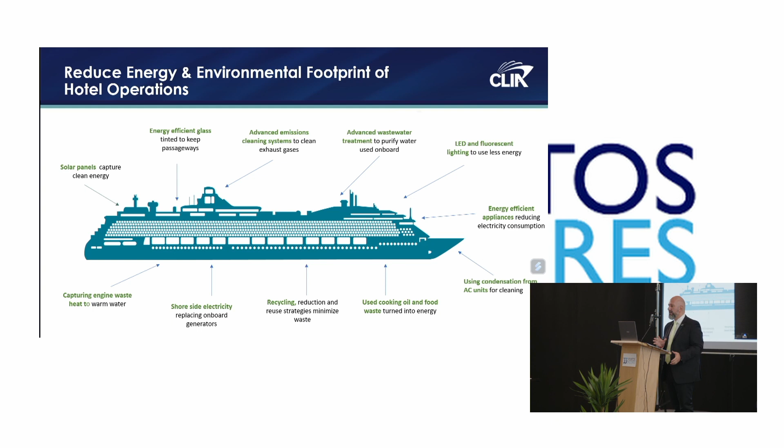So let's have a look at where the ships stand in this whole system. It is small letters, but it just gives you a rough idea about the different technologies that might be applied on a ship. So exhaust gas cleaning systems, systems to purify water on board, and a number of technologies to increase the energy efficiency. So a little bit about those technologies.

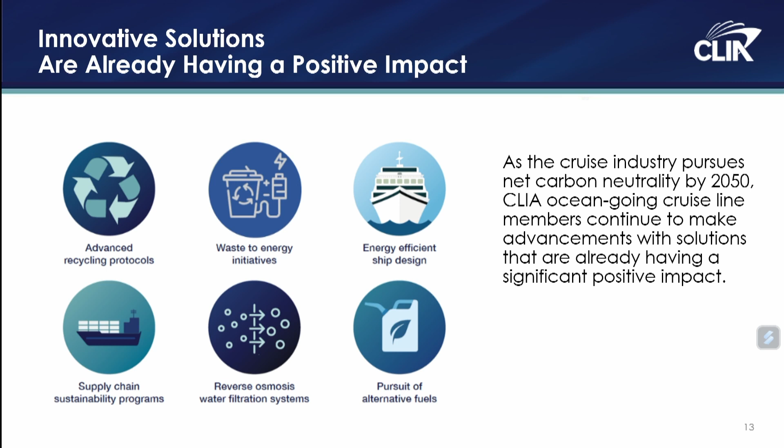CLIA ocean-going cruise line members will continue always to make advancements with solutions that are already having a significant and positive impact, as the cruise sector takes a leading role in driving the development of sustainable marine fuels. Sustainable marine fuels being explored right now include a range of options such as biofuels or other advanced approaches, biosynthetic fuels, methanol, ammonia, hydrogen. We'll see a bit more about that. With every new ship comes more advanced technologies, greater efficiencies.

And just to give you an example, cruise lines are deploying technologically advanced onboard systems to reduce waste and sort materials for recycling, with some cruise operators able to repurpose up to 100% of waste generated on board by removing, reusing, recycling and converting waste to energy.

In addition, there are advanced wastewater treatment systems on board, which treat wastewater to a higher standard than in many coastal cities. And they are consistent with a clear policy that all our member cruise lines need to sign, reaching above and beyond international legal requirements. These systems are in place in 74% of the global cruise capacity and are being built into 100% of all cruise ships on order for delivery between now and 2028.

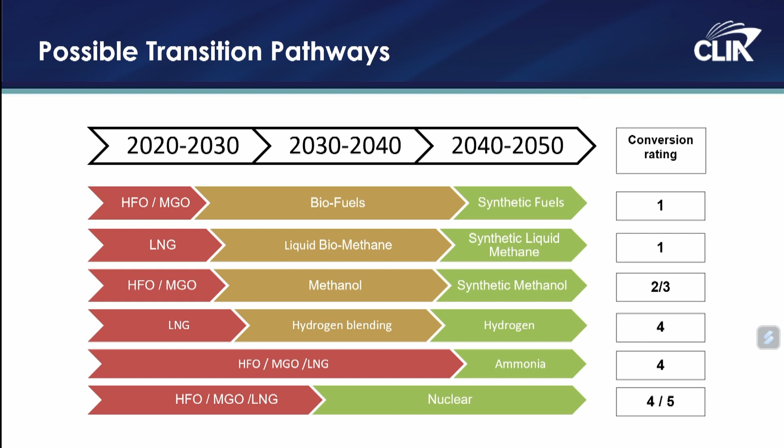In this path to net zero carbon cruising, there are intermediate short-term solutions and obviously long-term solutions some of us have been discussing for years. This schematic will give you a little bit of an understanding of the pathway and what is feasible or not. The complexity within the cruise industry is that vessels currently built and on order shall have a service life beyond 2050. And as the industry transitions between now and 2050, it will not be feasible to switch all vessels to low-carbon fuels before 2050. So a sensible transition shall target vessels that have a maximum return of investment time, balancing conversion costs and penalties against carbon-based fuels.

For a successful transition, a pathway should be adopted, and it is by the Green Deal and the Fit for 55 package adopted by the Commission, and one that is appropriate from a safe, sustainable, and technical point of view. Obviously, as you can see, the timeline on the pathway depends on the availability of fuel as well as technical maturity. So some of those solutions have been categorized as 1, 2, 3, 4, and 5: 1 meaning easy, 2 meaning feasible, 3 meaning neutral, 4 being uncertain, and 5 non-feasible.

So just to give you an idea, the transition from the traditional fuels to ammonia is a very difficult thing, and it might not be achieved in time, but there are solutions like biofuels, LNG, liquid biomethane, that can actually lead to synthetic fuels much quicker than anticipated.

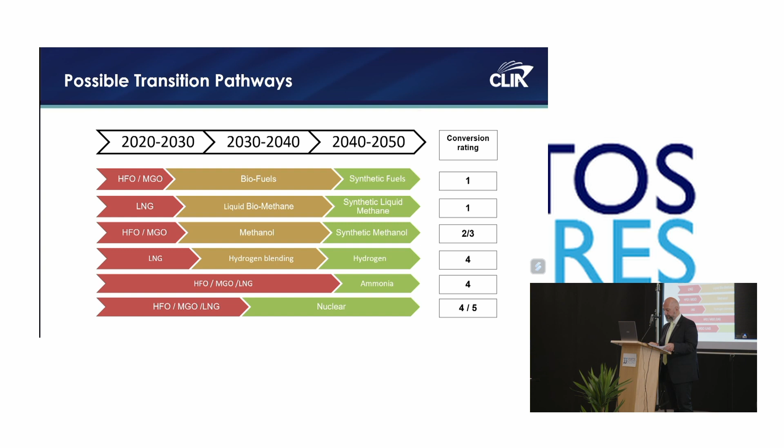So diving a little bit deeper into those, shoreside electricity is one that we've been talking a lot about. We all know the benefits of that by now. The point I would like to focus on is that there are 1,300 ports around the world where cruise ships call, and only 28 of them are actually equipped with shore power. So it is a great effort that needs to happen from world ports.

Whilst currently 40% of the CLIA capacity is equipped with shore power connections, and it will go up to 75% by 2028. So schematically, the ships are ready, the ports are lagging behind, and this is what we need to accelerate, but not everywhere. Not every solution makes sense in every port.

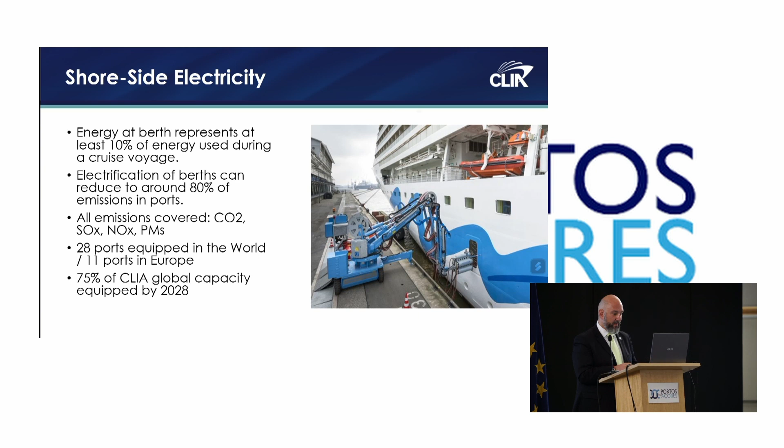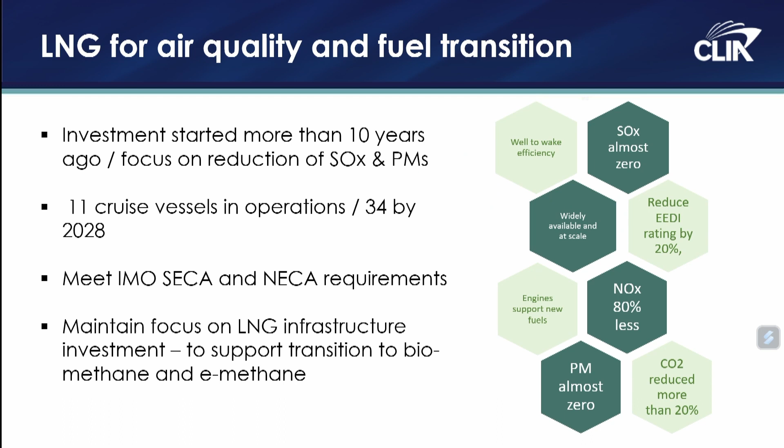The second part is liquefied natural gas. It's something we've been talking a lot about. Yes, it's a fossil fuel for the time being, but it is the pathway. So LNG is actually a transitional fuel that reduces the emissions. You can see almost zero SOx, 80% of NOx, 100% of particulate matter that is harmful for the lungs if inhaled. But it is also a fuel in itself in transition.

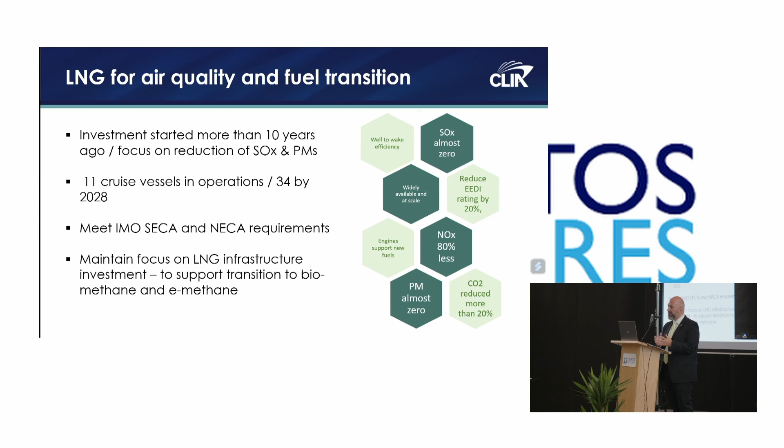So ships which are ready to sail with LNG, and we have plenty of those, you will see later on, can actually very easily convert to synthetic LNG or eLNG in the near future. So we still accept fossil fuel, but with a view to the future changes.

The only fuel that is readily available right now, but not at scale, is actually biofuel. So here it explains first, second, and third generation. Obviously, the first generation is something we leave in the past. The EU rules under the Renewable Energy Directive are focusing on second generation and third generation. And the good thing is that those are, in the last bullet point, drop-in fuels. So they're ready to be used right now.

So we have ships that did trials in Rotterdam with biofuels, and they did sail. Last week, another member announced that they are trying this on 3 or 4 of their vessels. It's obviously the scale of the availability that kind of stops a bigger number of vessels from using biofuels.

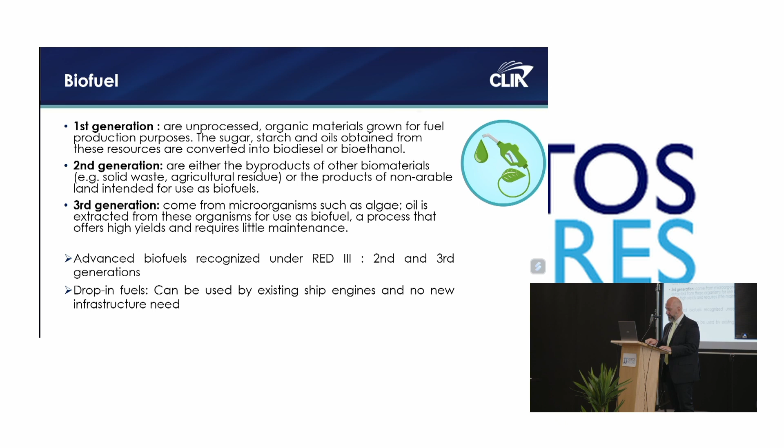Now, looking a bit at where we stand with all this information in mind, there are currently 11 LNG-powered ships in the CLIA fleet, and 23 more are coming. 78% is equipped with advanced wastewater treatment systems for the different types of water on board. You've got black water, you've got grey water, you've got wash water from exhaust gas cleaning systems, and all of that is being treated before being discharged.

And I have to note here that that type of water and any type of water is never discharged in port. So it all happens 12 nautical miles, in the majority of the jurisdictions beyond territorial waters, and there has to be a speed of 6 knots in order to discharge even treated water. So we are taking this in a very strict approach.

Now, looking into the future, by 2028, there will be 34 cruise ships powered by liquefied natural gas. There will be 171 cruise ships equipped with exhaust gas cleaning systems. So those that still have to use some kind of traditional fuel will have exhaust gas cleaning systems, and we will see how those work.

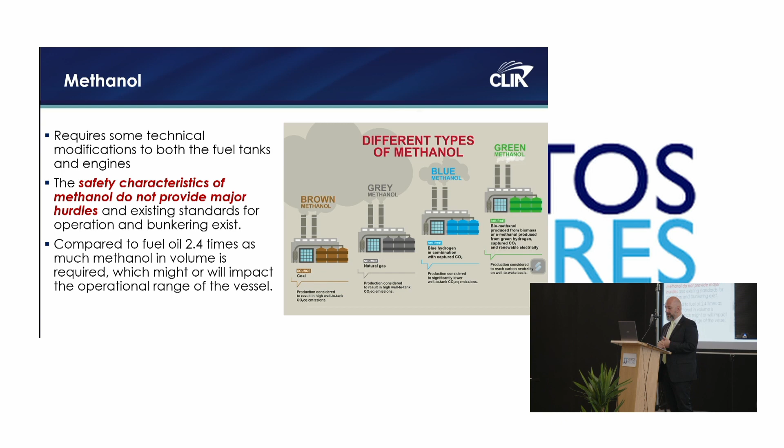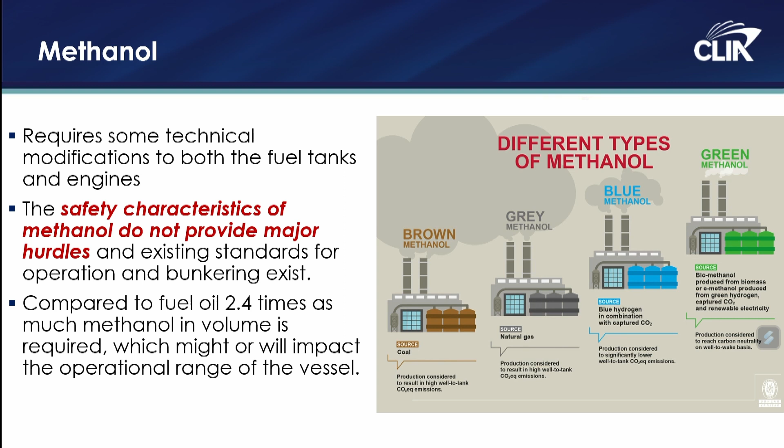But there are also long-term solutions, and I know I shouldn't be keeping you here for long. Just very quickly, methanol is one that our members are actually looking at, and there are several trials underway. So there are safety characteristics which do not provide major hurdles. Obviously, there are different types of methanol being developed. What is important is that, compared to fuel oil, 2.4 times as much methanol in volume is required, which means that ships need to be retrofitted and change the type of tanks and the size of tanks. So it takes a little bit of work, but it's a viable solution.

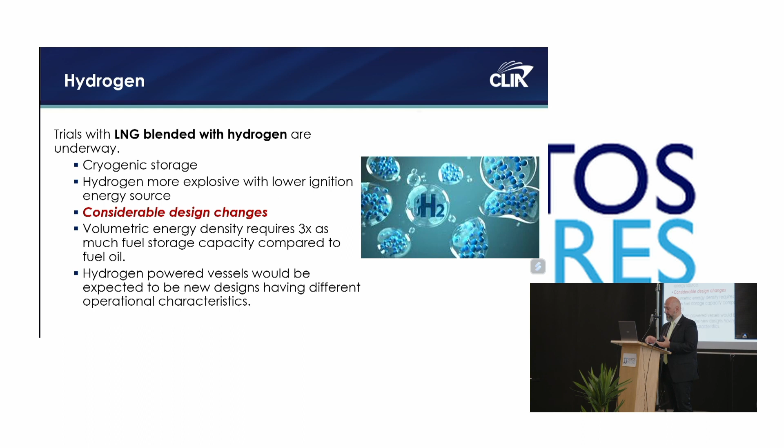Hydrogen: LNG, as we said before, is fossil fuel for the time being, but it can be blended with hydrogen, and those solutions are being looked at. So there are some considerable design changes that need to take place, but it is a feasible solution, absolutely. Again, the volume for storage on board is actually what is required.

Ammonia is a solution that is being looked at for the maritime sector, but as it highlights here, it is a highly toxic gas. So its application on cruise ships is questionable for the time being.

I'm not sure where the technology will land, but that actually gives me a point that for handling all these fuels with the different temperatures, the different pressures that they're used at, crew members on board, but also port workers need to be educated, need to be trained. Port infrastructure needs to change. It is not as simple anymore as installing a tank for diesel oil and just fueling the ship. It is much more complicated.

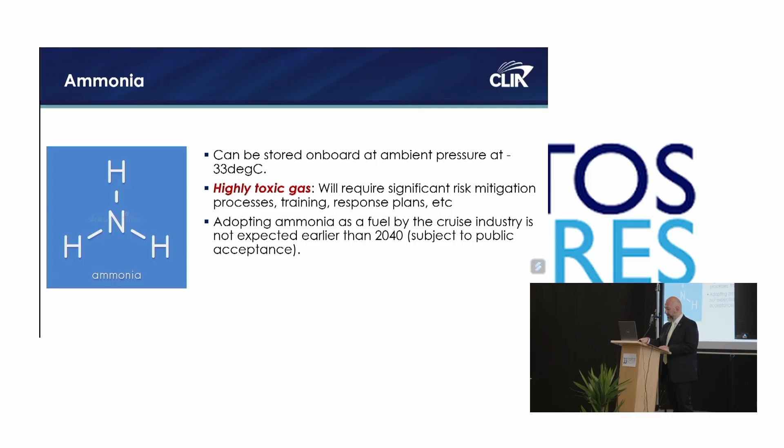So as we talk about biofuels, as you mentioned, Your Excellency, we actually need to look into infrastructure developments as well. And then fuel cell technology is something our members are definitely looking at, and there have already been trials underway, and it could be a good solution because it can use a variety of fuels. So methanol, ethanol, natural gas, biogas can be used in fuel cells.

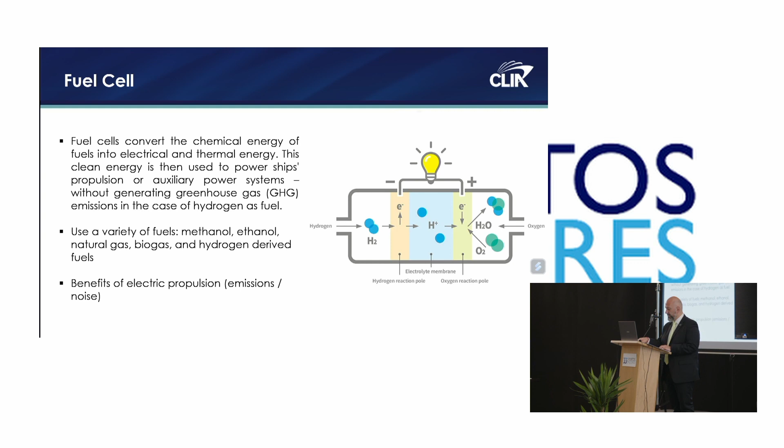The last point I want to make is that batteries and wind technology are also being explored. We already have hybrid cruise ships which have batteries on board, but those can only be used as ships' auxiliary power solutions. So they can support for a little while, maybe when the ship is at berth, but those are not the primary source of energy.

And the rule of thumb here, something in the Azores you're probably very familiar with, is the Atlantic crossing. So for a ship, either cargo or passenger, the fuel is good if the ship can actually cross the Atlantic without need of refueling, and that's the rule of thumb there. Maybe with our electric cars we can afford to stop on the road and charge them again. But when it comes to planes, when it comes to ships, that's not advisable, I would say.

A couple more slides I have just on the timeline and actually on the communication we do around that. So keeping the timing a bit realistic. I think I missed a slide here. Just let me go back. Yeah, okay. So keeping the timing a bit realistic, you see that

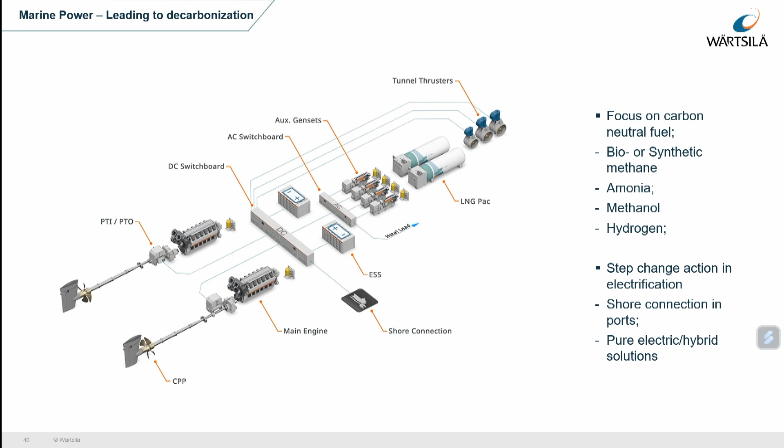So we are now betting a lot on these new kinds of fuels, but we are also taking quite a step forward in electrification. On one side, indeed, we have the shore connection that we will speak a little bit more in depth about here, but we are also betting a lot on pure electric or hybrid solutions.

Because on one side, okay, if it's pure electrical, it's purely based on batteries, but hybrid, using the batteries, it can allow us to run the engines more efficiently. And in the end, the batteries are like a Swiss Army knife. They allow us to do different things. So we can optimize the engines.

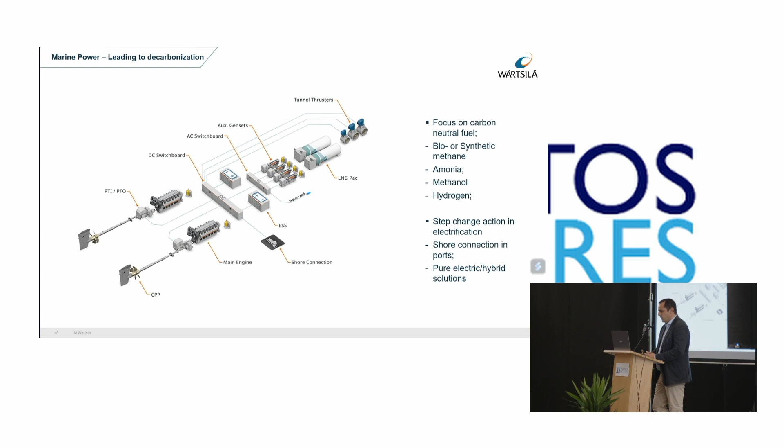We can, during a black start, use only the power of the batteries. We can enter and leave the ports just purely running on green energy. So there is a lot to do. It's not only a matter of, like electrical cars, taking us from A to B. We can optimize the entire ship using the batteries.

But okay, the theme here is the onshore power supply. And this is basically not only for cruise ships, but the idea is to take this broader to all other segments. It's so that when you get a ship in, you can switch off your engines, and this on one side can cut all the harmful emissions. We also take out all the visible smoke and noise pollution, because as we know, especially for those who live around the ports, this also has quite a big impact on the city surroundings.

What are, let's say, the challenges here? The ports have to be flexible to take on different frequencies and voltages, because every ship is a little bit different from the others. So one can need to receive 11 kV, the other one needs 6.6 kV. We know that here in Europe we use 50 Hertz from our electrical grid, but many ships have 60 Hertz. So we actually have to transform from 50 to 60 onshore, and then we pass that frequency to the ship.

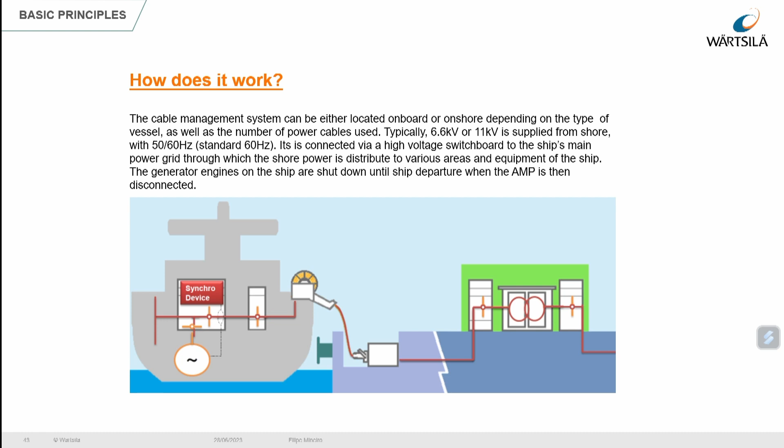So when the ship is arriving, we are taking the power from the shore. We are connecting all the cables. And then, okay, it's not as simple as plugging in, let's say, our toaster at home. We have to align the different voltages, the frequency. We have to make sure everything is okay. And then, indeed, when there is no problem, we can actually connect and then slowly reduce the load on the engines and be purely connected to the shore side. So this is roughly the idea.

And yes, we may need to take different voltages, like I'm saying here, and we have to take into consideration which frequency we are using. And then when we want to go out, we do the reverse. We start our engines again, we synchronize with the grid, then we slowly go up with the loads on the engines until in the end we open the breaker and then the ship can go out again. So this is more or less the basic concept.

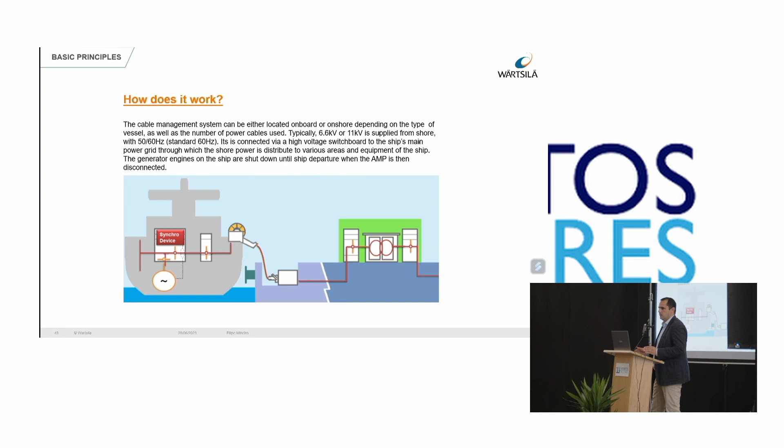Of course, there are other issues behind it. There is a strong focus on safety, because you can imagine there is a high voltage cable passing through with 11 kV and a lot of amps. So everything is studied so that in case of some emergency, it opens, so no one gets hurt. I'm not going to go too technical on this, but

the power demand that some ships can have is actually quite huge. Not all, because, okay, let's face it, the smaller ships, for example container ships coming to this island, are relatively small, but we still have to consider them. And we are studying, and most of them will actually be in low voltage. But the standard defines for high voltage that, for example, ro-ro ships can take up to 6.5 MVA, which is a lot.

Cruise ships can go up to 20 MVA. That is what the standard requires, especially for the bigger cruise ships that are showing up. Containers, 7.5 MVA, but this is already for the 300-meter container ships, especially for the fridges they carry, because there is a lot of power consumption there. LNG carriers, 10.7 MVA, and tankers up to 3.6 MVA. So the scale of the power that we are talking about is huge.

It's not like a refrigerator at home. This is a huge amount of power, and what normally is not a problem, let's say, or is still a problem, obviously, in Europe or the US or other countries, in the islands is a particular challenge. And we will focus a little bit on that.

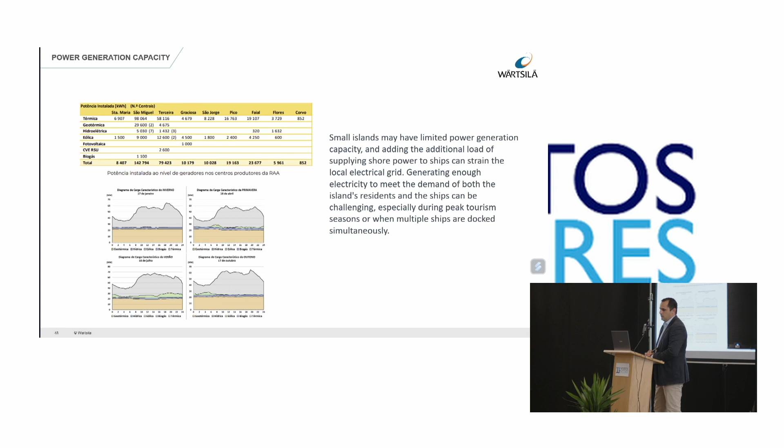And indeed, as you can see, some islands just don't have the full installed power to take in some of these bigger ships. And we have to take into consideration that, for example, even here in São Miguel, even if we say that we have 142 megawatts of power installed, it needs to have a reserve, because you may need to do maintenance on some power plants, on some engines. So not all of this power may be available at all times. And this is something that also has to be considered when doing these studies for the islands.

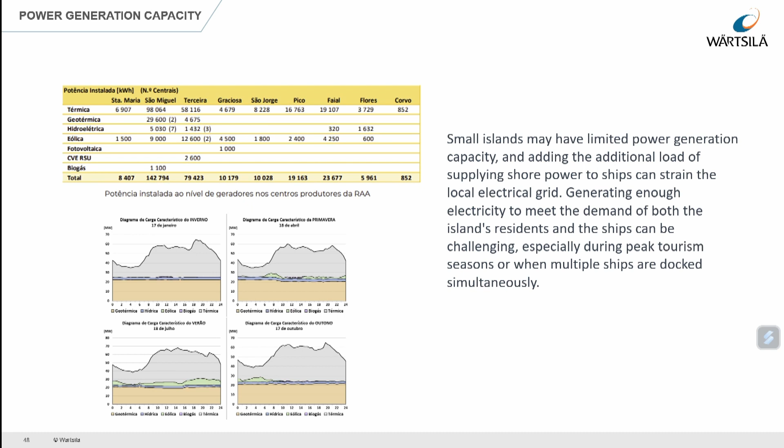There is also the challenge of the energy quality and the resilience of the electrical system. Because, again, we are in Europe, yes, but we are not on the mainland. So, because everybody is a producer, we have to take special care, for example, about the frequency. And the frequency, these 50 hertz that we hear about, is really important to the quality of the grid. If we go out of these 50 hertz, a little bit up or down, we may need to take some special measures, like cutting some part of the island, or we can actually have a blackout on the entire island and have no more energy.

And this is regulated by the load and how much load it can take. And what happens is, for example, a load immediately gets out of the grid. So there might be variations, and we have to keep this in a very stable manner.

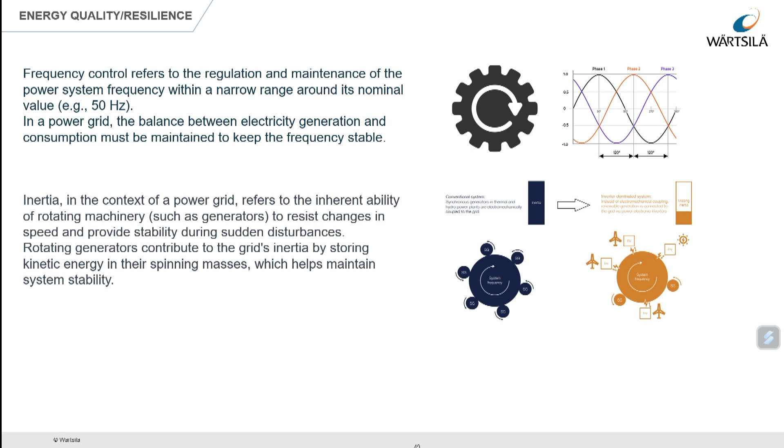The other one is the inertia of a system, and the inertia is coming from the generators. So I think you all have seen images of a turbine or a hydroelectric plant where it's rotating a very big mass, and this very big mass allows to keep the grid very stable. So every load change, because the inertia is the tendency of an object moving to keep moving, when we try to accelerate or decelerate, it will provide us this help to keep the 50 hertz stable.

And when we put in more load, or actually, and this is a little bit in parallel, when we try to put more renewable energies that don't really have this possibility to support the inertia of the grid, we are weakening the grid itself. So we have to take this also in consideration.

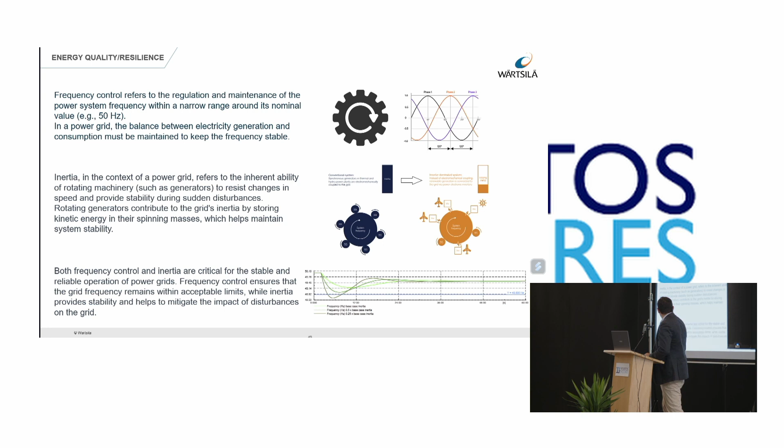So yeah, both the frequency and the inertia, they are critical, because the more load and the more renewables we try to put in without having some kind of extra support, they can lead us to situations where we have to unload part of the island, or it can actually lead to a blackout.

Then it's the matter of the logistics. And because of all of these challenges, there has to be a quite effective communication between port authorities, ship operators, and power providers. If we have such a big ship coming in, for sure the island at that moment is not ready to take in the extra power. So what we have to do, when the ship is coming, the port operators have to tell the dispatch center of the island, hey, I have a ship that normally will require an extra 11 MVAs. Are you prepared to provide this energy?

Yes, no, and how? And only after all of this communication, and it is allowed, then yes, we can provide the energy. So there has to be a completely different cooperation between all of these entities.

And then we have to engage actually all stakeholders. This includes all government agencies, shipping companies, and environmental organizations. And I will probably focus here a little bit on the shipping companies, because, for example, here you cannot just decide, yeah, I want to make shore connection, without speaking with the regular container vessel companies that are coming here,

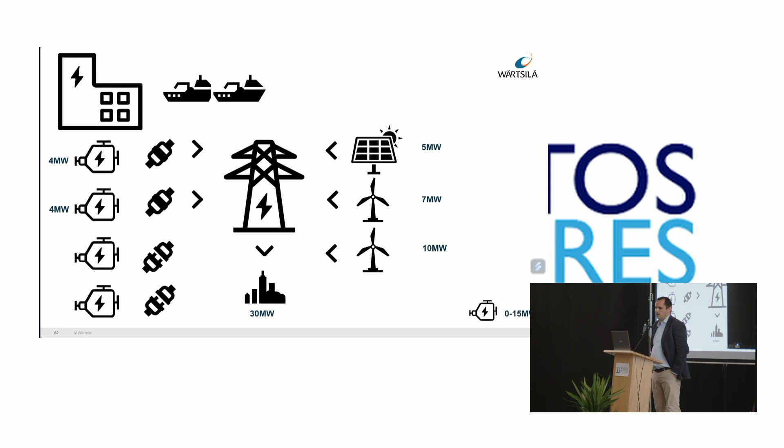Great. Here we go. Now we are having two vessels. They will want to connect. That's perfect. They will connect with 5 megawatts each. I don't really know how to work with this one. It's not really working as well, but okay. Each vessel can have a power consumption of 0 to 10 megawatts. So we are being modest here, and I was giving them just a prediction of 5 megawatts.

Everything seems okay. Each engine has 9 megawatts. We are producing a lot of renewables, perfect. But the problem can also come from one of the engines. And now, for a safety reason, it had to shut down. What do you think will happen? So these 9 megawatts that were being produced there, bloody hell, they are going again to the other engine. Again, we are out of electricity. So this doesn't work just like this. Just because we are powering 2 more vessels, we have to do something else.

Let's see, again, the vessels are coming. I don't know what happened with the other vessel. Here it is. Before they connect, let's turn on one more engine, just for fun. Let's see if this one works now. Yep, I managed to connect the 2 vessels, so I'm giving them power. All the engines have 6 megawatts. They are actually running at 35% load, so it's perfect. I don't see any problem coming this time.

So what can we do? A quick example because I'm running out of time. We can do something like what Wärtsilä has implemented on the island of Graciosa. You know this project probably even better than us. But adding a battery energy storage system to the island allowed us to reach up to 63% penetration of renewable energies. And the key figure here is that it was able to run 144 days at 100% renewable energies without the power plant. It was there just as a backup, but it was not necessary.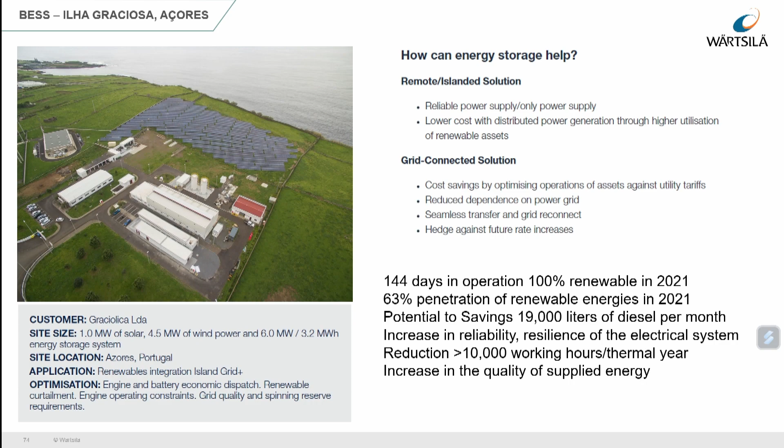We reduced working hours, we increased reliability of the grid, because if I could show you here a graph of the frequency, it would be perfect. And we also have all the savings in fuel and harmful emissions. So basically, I can actually switch off one engine if I have a battery storage system, even under unfavorable conditions for the photovoltaics and the windmills. So this is more or less the concept we have to achieve in order to really provide power efficiently to the vessels, but in a green way.

Yeah, and this is basically what we want to try to achieve. Using all of the renewables, using new fuels to power the ships, hybridization, shore power, all of these concepts aligned to really indeed go to a carbon neutral future. That is the idea.

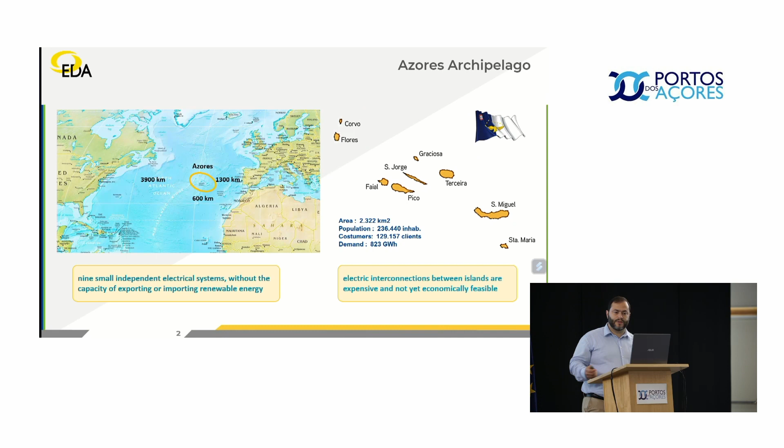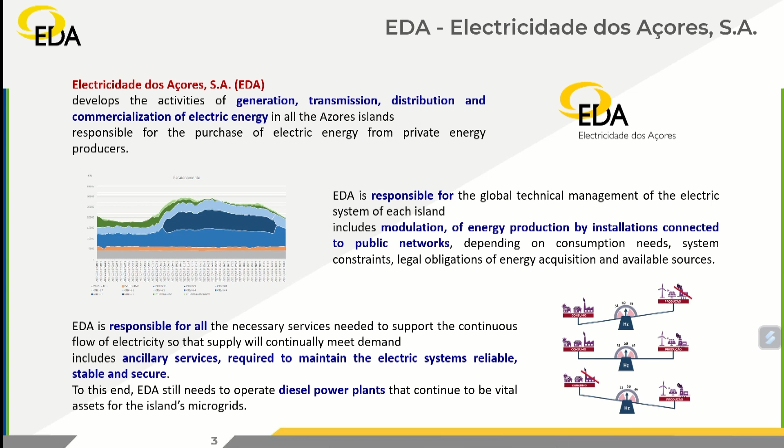Electricidade dos Açores, EDA, is the electrical utility that serves all the Azorean islands. We go from generation, transmission, distribution, and commercialization of electric energy in all the islands. And we also purchase electric energy from private energy producers. So in generation for the public services, this is thermal generation that is needed to grant the security of supply. And we also have a company in the group that also has the renewables installations. We are responsible for the modulation of energy production from all the installations, from ours and from private companies. And we also are responsible for all the necessary services to support the continuous flow of supply.

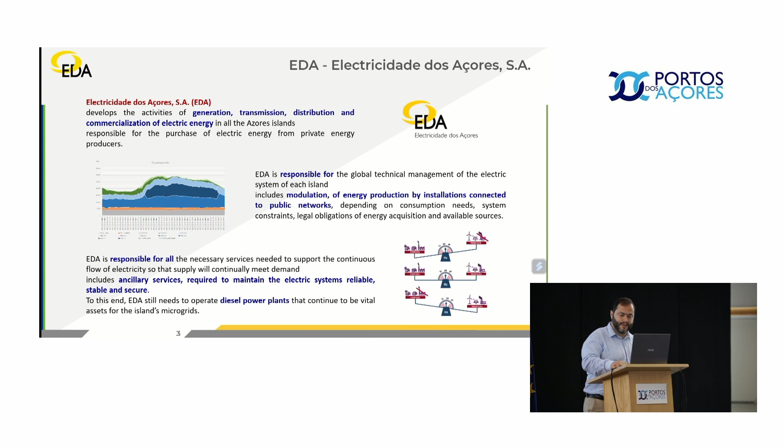And for these ancillary services, it is very important, and it has been for a long time very important, the diesel power plants. We don't like them. They use fossil fuels, they pollute, but they are still needed in this kind of islands. So here are the 9 different isolated electrical systems. The largest island is where we stand. This is the population. The demand is similar in the proportion.

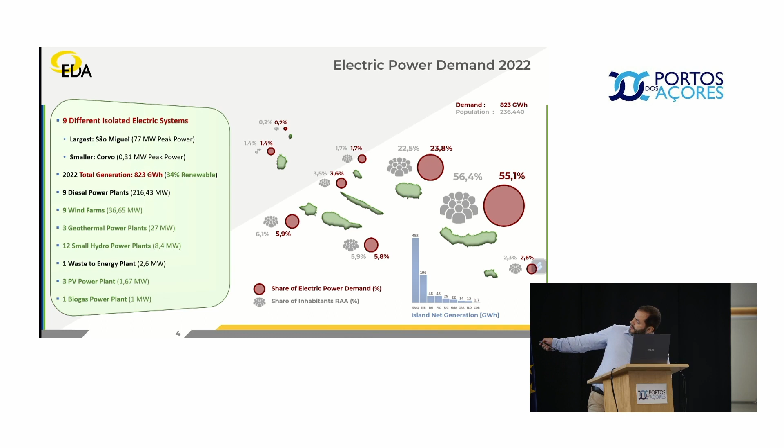You can see that 55.1% of the electric power that is produced here in the Azores is in this island. If we add the second biggest, Terceira island, we have about 80% of the total production. With 2 more islands, we have 91%. So the other 5 only represent about 9% of the electrical production. So it affects the integration of renewables. We want to integrate renewables in every island, but the biggest impact is these 2 bigger islands. I don't want to call them main islands, but bigger ones.

We have in each island 1 diesel power plant that is needed to ensure all the services, to keep the energy quality and the security of supply. And then we have a lot of renewable plants.

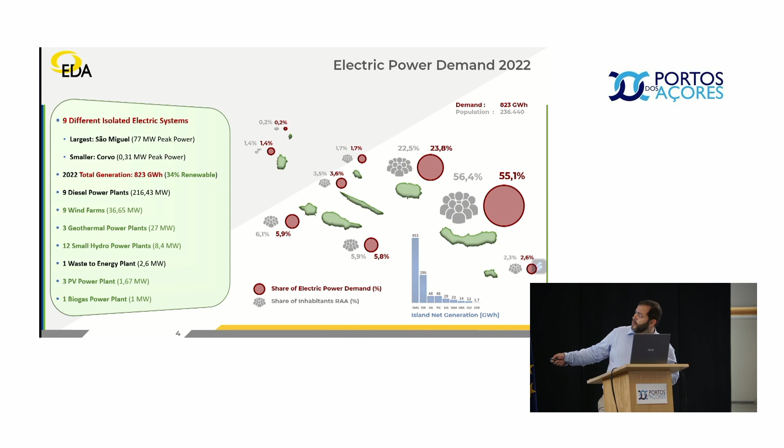And these geothermal power plants are only in São Miguel, 2 in São Miguel and 1 in Terceira Island. So this is the electric generation in 2022. You can see that we achieved about 34% of renewable in 1 year. We can achieve more than that in 1 day or in 1 instant, but during a year, only 34% from renewable.

Then here in these islands we have achieved 44% last year. We had a problem with geothermal. We can achieve about 50% of renewable in this island, mostly because of geothermal production that is stable and constant for all the year. And Terceira Island also has a geothermal power plant. It's newer than the other ones, but it also contributes a lot of energy.

And then we have Graciosa Island that had an innovative project because of the hybrid system. You can see in these 4 islands, it is difficult to achieve more than 20%. On average, we achieve 15% of renewable because of the variability of the resources. And so we need to have thermal engines working when there is renewable. And the amazing thing is when we have more renewable, we need more engines. And that's complicated, so there is a limit.

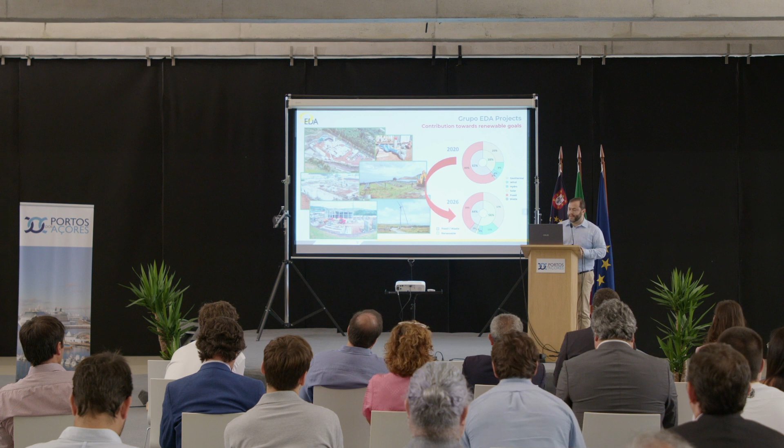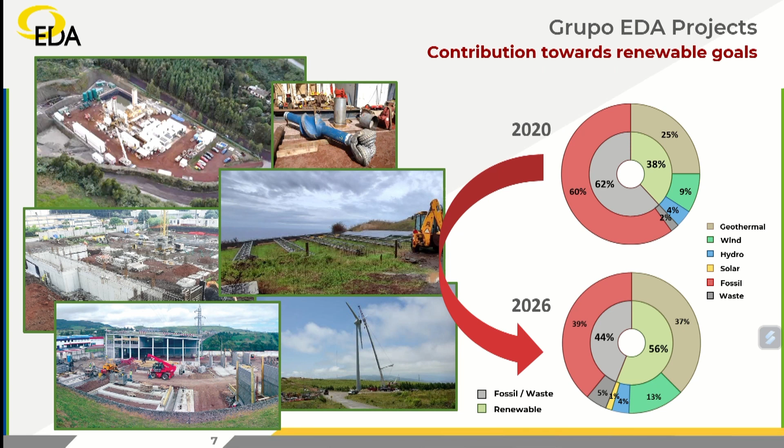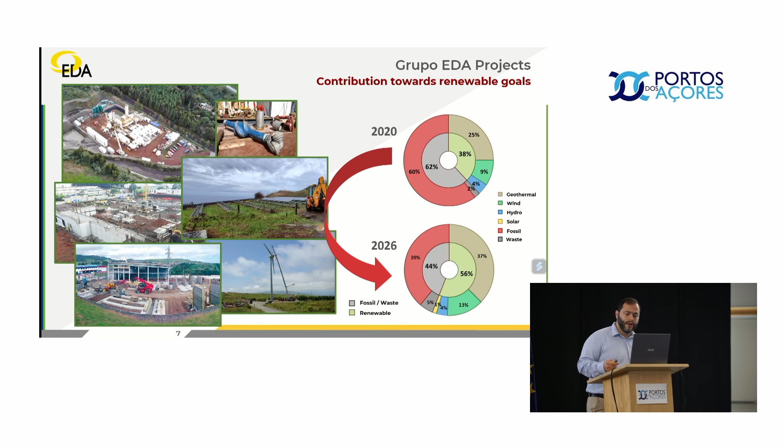So with all these investments, we want to achieve 56% of renewables plus 5% of waste to energy. This is the private contribution that I was talking about that is also considered here and is important for the region. It's not renewable, but it's important also. This is what we want to achieve.

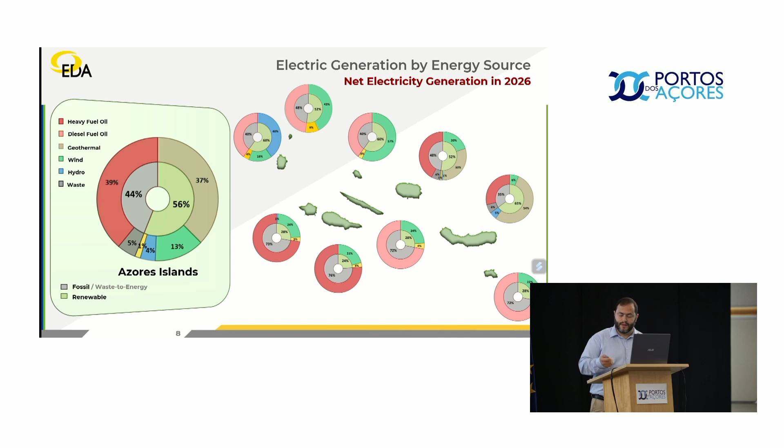So in 2026, as you can see, it is much easier to get higher numbers here. Here we have some difficulty because of the intermittency, the power is not always available there, wind and solar only during the day, and it changes during the day, even if there are clouds. So this is a big goal, this is 2026.

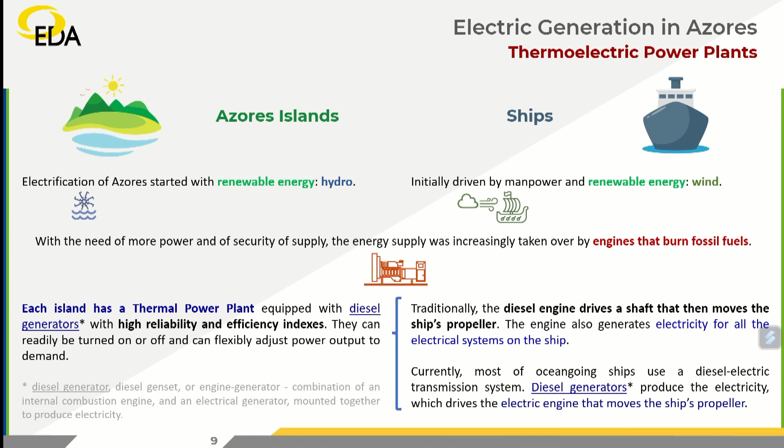So in ships, we traditionally had these diesel engines that drive a shaft that then moves the ship propeller and also generates electricity. Currently, about 80% or more than 80% are now diesel electric transmission systems. So they have a diesel generator, but it produces electricity, and then the electricity does the movement. Okay, this is in maritime.

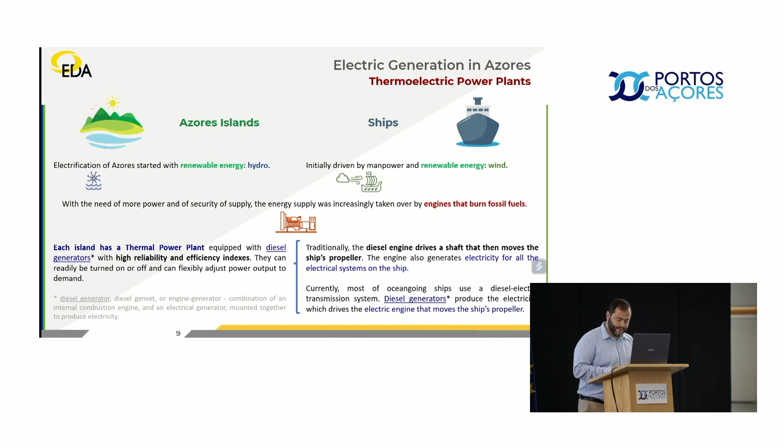And so we benefited from this development because we are nothing compared to maritime transport. So if something is developed by the suppliers, it is because of this need, not because of small islands. So what we have is high reliability and efficiency from diesel generators because they were improved and developed for the ships, okay? So we use the same technology as the ships. That's the only thing that I would like you to know.

I think I should, I don't know with that. Can it be the presentation?

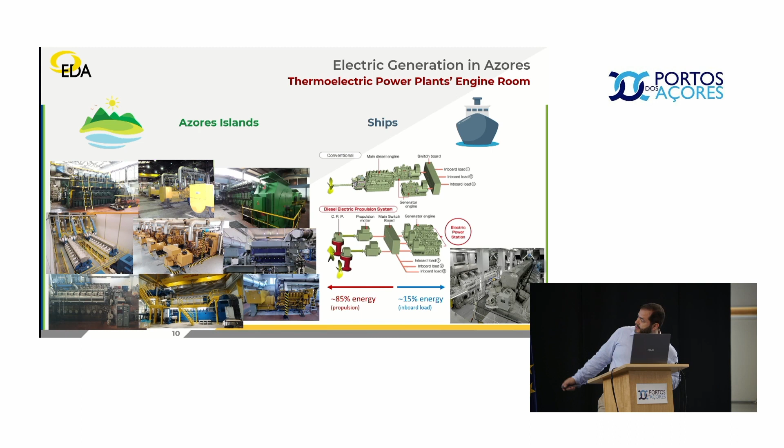Okay, thank you. So, these are the similarities. And so, in the island, we only use this 15%. If we put here a ship that needs 15% similar to the island, if we were going to give more energy for the propulsion, it would add 85% more. It's a lot of energy that makes the ships move.

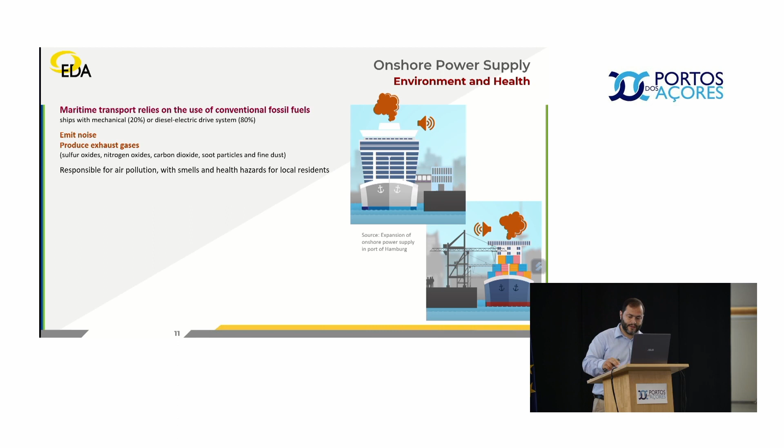So here is environmental health and why there is the need to have onshore power supply. The problem is that when maritime transport uses conventional fossil fuels, they emit noise and produce exhaust gases when they stand at the port. So the European Commission wants onshore power supply to be a solution to improve air quality in ports and coastal areas through this connection here.

So in technology that is already available for electric ships, we have the ones that I have told you that currently exist. Now there are the new ones with hybrid drive systems, where there is some battery on board in addition to the internal combustion engine. And these ships can sail even without the diesel engine, but just for a certain length of time.

But the most important, and it is like a Swiss army knife, the batteries help much more than just running for a certain length of time. They help make the use of diesel in ships more efficient, and they reduce the emissions of all the ships, not only by making the ship run only on batteries, but by helping the way the load is distributed in the engines, in the diesel engines.

Then there is the new fully electric drive system, where all the energy comes from the batteries. Currently, it is possible for ferries and inland vessels because they sail shorter distances and dock frequently, and can exchange batteries or briefly recharge them.

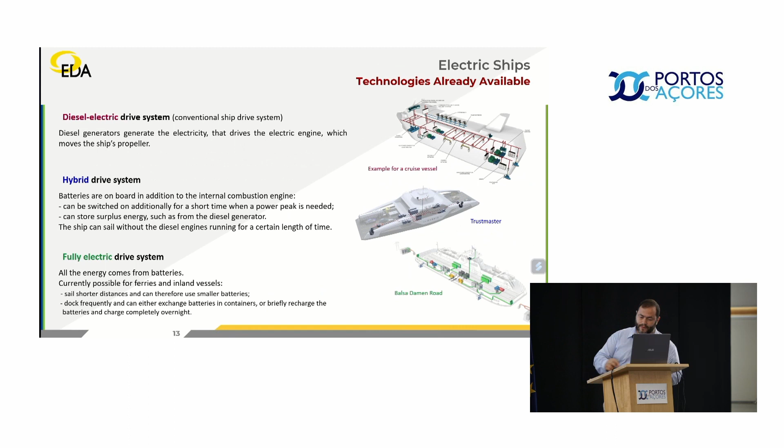So these are numbers for the ships, for the onboard load, the hotel loads. This is 15 to 20% of the load of the ship. And you can see here that the average power demand of a cruise ship would be 7.5 megawatts. It's a lot for an island like ours. You can see here São Miguel, the peak demand is 77 megawatts, but in most of the smaller islands, we don't have this 7.5.

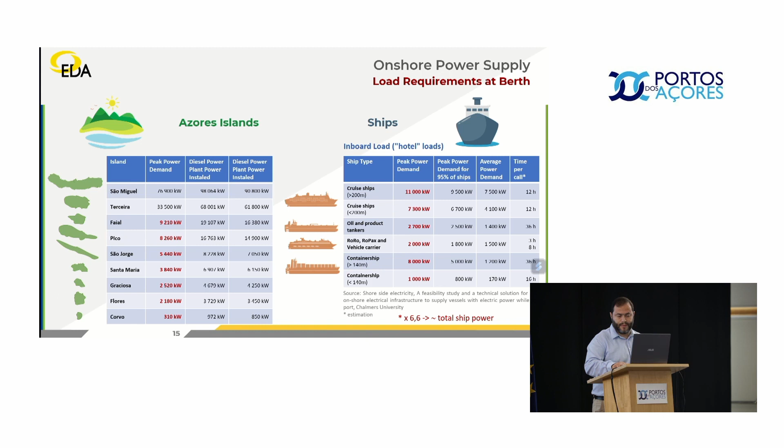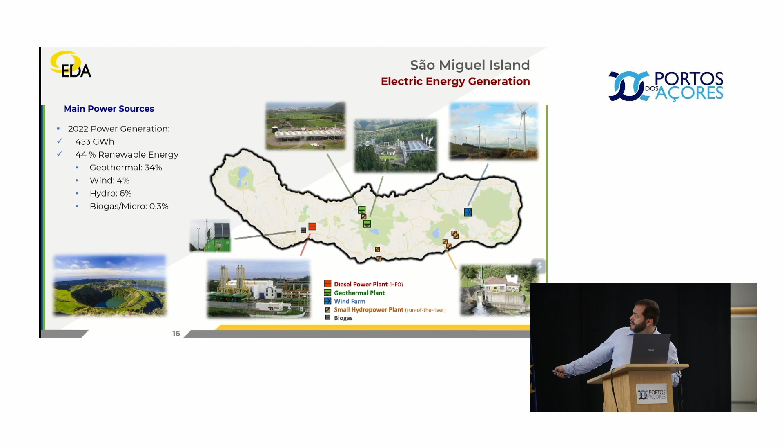And so I'm going to show just an example, this island where we stand. We have here 2 geothermal power plants. These small ones, these 7, are hydro power plants, run-of-the-river power plants. Then we have here a wind farm, biogas, and the thermal power plant. And we could achieve 44% renewable last year, mostly from geothermal.

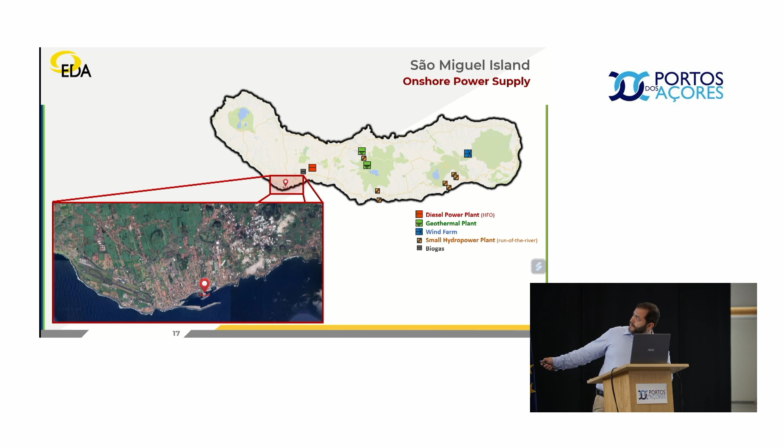This is where we stand. This is Ponta Delgada, and we are right here. And you can see that there is some distance to this diesel power plant and more to the renewables. Another challenge is that the port, the harbor, is here in the city, and the substations that feed the loads are around the city. If we want to get power from these substations to the harbor, there are only underground infrastructures. So if there's a big increase in the load here, we have a huge investment, and it takes a lot of time because we have to build infrastructure in city streets, and it can take years.

Also, if the power is very high here, we need to invest not only in these connections, but also in these substations. In the substations, we may need to put another transformer. And to put another transformer, we may have to expand the substation. To expand the substation, we have to have space. And those are all challenges. And going up from there, the transmission lines are enough until now, they can handle it, but then there is the diesel power station.

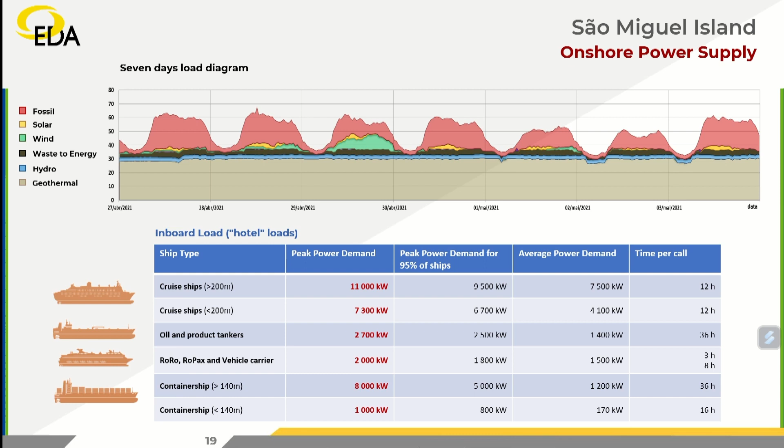So if we put these ships here, and if we, for example, put a cruise ship here connecting in a harbor and being supplied by our electric system, what would happen is that they usually are here during the day time period, and during night they go. So this would increase here the need. That's not good. For us, the best will be to fill this part of the diagram, because we already can't put here more renewable. We could put more if this load would be put here. Here, we will need to have more diesel power.

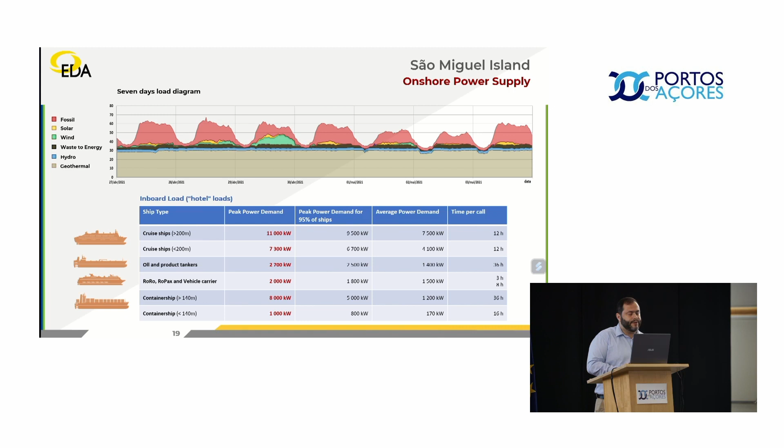And you can say, but you can increase renewable. We can, but the share may not be higher than what we have. And so we will have the same pollution. So this is one thing that has to be studied and analyzed. If we had a lot of storage capacity, and that's very expensive, and the technology is not available for that much amount of storage capacity, we could store here with wind, or even geothermal. You can see here that we had more geothermal that we can put in the system, and then we could use this energy for the ships. So all things have to be studied previously to take some decisions.

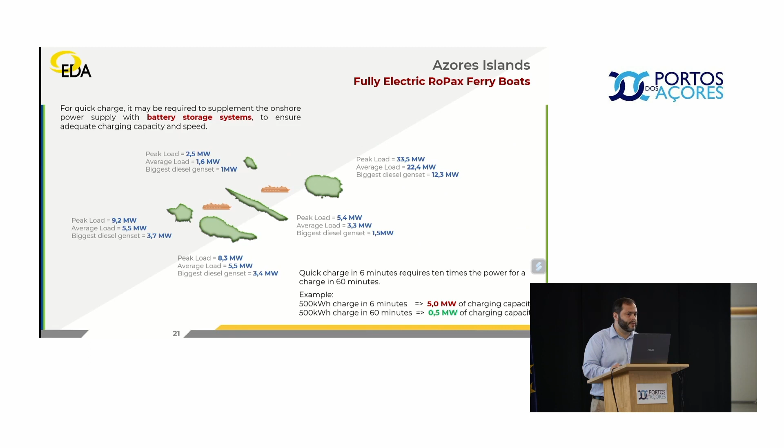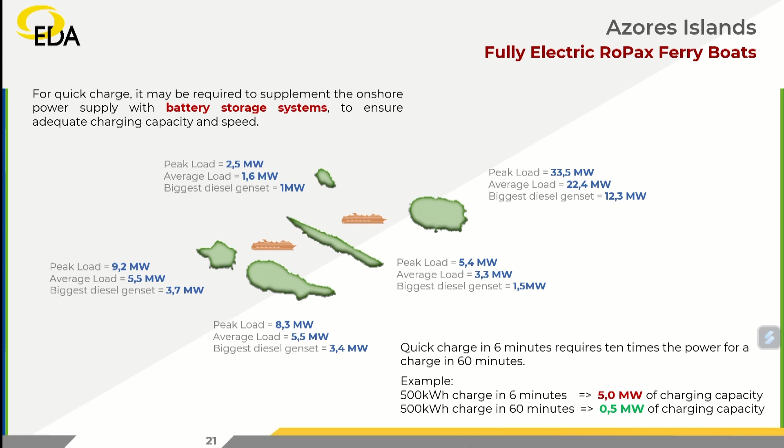And another thing is that a battery energy storage system is also needed because of problems that were already told. Frequency regulation, because the very fast and quite high variations can give problems to the system and can make the system shut down some diesel generators, because they are not as fast as intermittent variable energies like wind, solar, and even from charge or discharge systems. So everything can be done, but you will need the help of a storage system.

So, challenges. Challenges is all I've been saying. Charging infrastructure in the ports and suitable connections to the grid. As with the private investors that want to build a solar power plant, they come here, they think, oh, this size, this value, solar panels cost this, inverters cost that, substation that, and it is viable. But it's not like that.

There are a lot of people that come here and think that those are the numbers, but those are not the numbers, because we are in small islands and there is more investment to integrate that facility and that amount of energy in here. So there has to be a grid connection, and the grid connection can be very expensive, okay? Similar to that, charging infrastructures also have to have suitable connections to the grid. And it can go to €1 million and many million euros in investment, okay?

Another thing, this plus the charging infrastructure that is being made at the port. And then there is the high power rapid charging capacity that we have thought of for the electric ships, which is very costly and hard to achieve. Then there is the renewable energy production capacity that we are going to invest in. But anyone nowadays can do their own investments. There is self-production, and many entities are investing in that.

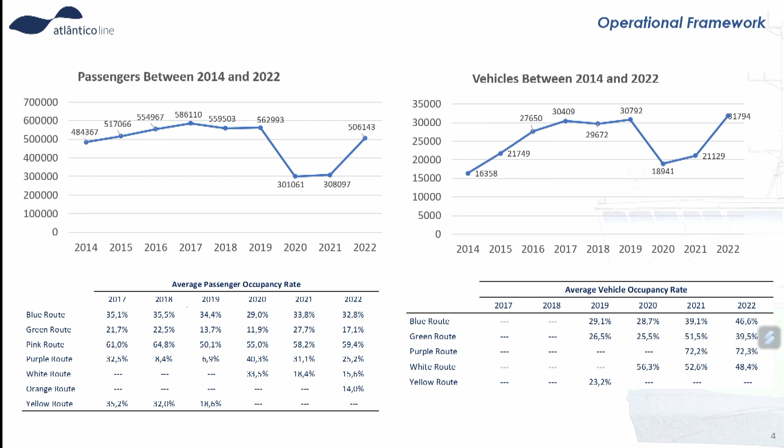This is what we have in the central group. You can see by the colors. The blue is our shortest trip, about 4.5 miles. Then we have between Velas in São Jorge and São Roque in Pico, about 10 miles. Then you have Madalena to Velas. We always call it the green one.

And then we have the other ones I mentioned, the purple, that goes from Horta, Madalena, Calheta, and then Praia da Vitória. Nowadays we are moving to Praia da Vitória because Angra is working in the port. And then we have the white one that goes all through São Jorge, goes around, goes to Graciosa, and then to Praia da Vitória.

And this is very important for us because it's completely different to go on a 10-mile trip that takes about 50 minutes than to go 57 miles, which takes about 4 hours. It's completely different, and the passengers are telling us that. Many passengers nowadays send the car from Praia da Vitória to São Jorge by boat, and then they fly to São Jorge, because it takes 20 minutes and not 4 hours. And that's something that we have to realize.